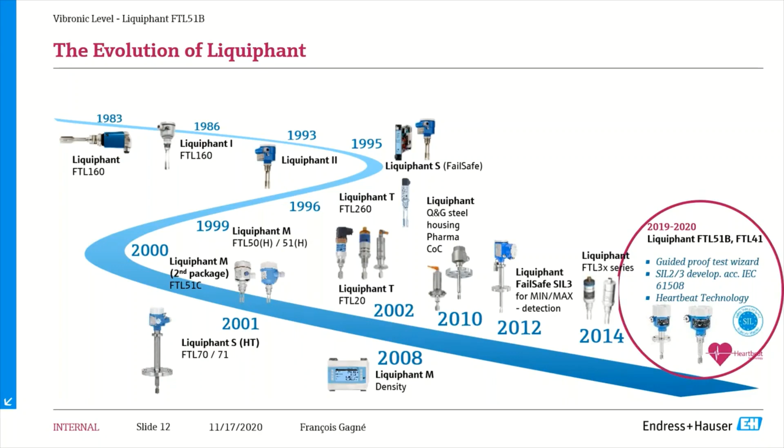Today we're going to focus on the latest edition, the step in the present and the future of vibrating forks, the FTL51B. We also launched the FTL41, which is a stripped down, more basic version of the 51B. We won't talk about it today, but we did launch that more basic version at the same time.

So for Liquiphants, the challenge was to have a fully welded sensor with no moving parts or additional seals. So unlike float switches, for example, vibronic instruments do not require maintenance and have a long service life. Other advantages: they're very easy to install, basically plug and play. In most cases, you don't need to adjust or calibrate anything. Since there are no moving parts, no wear and tear, it's basically maintenance free.

And it's a technology that's not affected by buildup, as long as the fork can vibrate - air bubbles, foam, suspension, vibration, viscosity, and pressure and temperature changes. Any turbulence won't affect the Liquiphant.

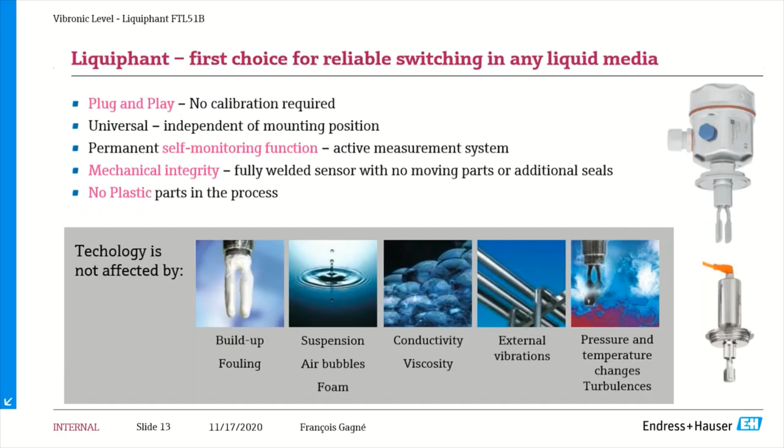As I mentioned, we're going to focus today on the 51B, but as you may have noticed on that timeline, on the evolution there, we have different models: compact, hygienic design. We have the FTL70/71 for high temperatures, the FTL80/81 for fail-safe overfill prevention in applications with functional safety up to SIL 3. But today I want to focus on the latest edition, the 51B, though I wanted to show that there are other options that we have in tuning forks and vibronic level.

So the 51B, we call it the all-rounder because of its versatility. Point level detection for tank overfill prevention or pump dry run protection, so high alarm or low alarm. It's a SIL 2 or 3 device, with proof test that can now be supported by a wizard that walks you through the steps. We'll have a closer look at that.

Heartbeat - if you've seen Endress Hauser product presentations in the past few years, you must have heard about Heartbeat. Now it's coming to the Liquiphant with the FTL51B, and that's a big change. Lots of value there. We'll have a closer look at that.

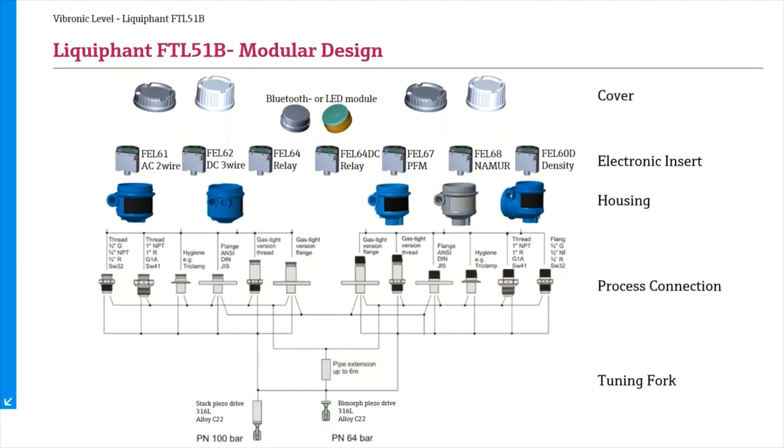Of course, different process connections, as I mentioned, the 100-bar option, different electronics if you want to do density, for example. We'll have a closer look at that later. So yeah, we still have that modular design or product structure. These are the four key new additions, benefits that the FTL51B brings.

To the vibrating fork range, and I want us to have a closer look at these one by one. So the Bluetooth connectivity, the heartbeat technology, as I mentioned, SIL, but most importantly SIL proof testing, and also we'll have a quick look at that LED light, which is a great addition. Let's start with Bluetooth.

We're adding Bluetooth to more and more of our devices. It's a popular feature. This for the FTL51B would also work with our SmartBlue app. You can connect for sure from 10 meters, but in ideal conditions we were able to reach 20 meters. 10 meters for sure, so that's 30 feet up to 60 feet if everything's perfect.

And you will use that Bluetooth app and interface to access heartbeat diagnostics, verification, monitoring. That proof testing wizard walkthrough will also happen on the Bluetooth app. And of course, as you may know, everything we do with Bluetooth is super secure with encrypted data, so no issues there. You can get our app for Android or Apple.

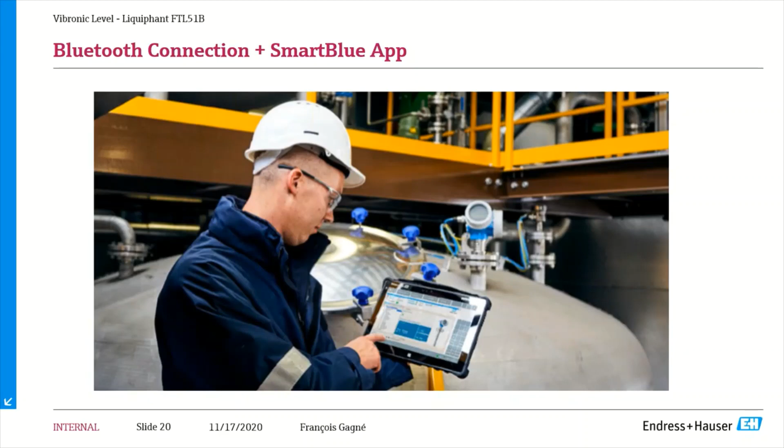So that's Bluetooth connection, and as I mentioned, Bluetooth and the SmartBlue app will be your gateway to heartbeat. What is heartbeat? Heartbeat, again, it's the same thing for the FTL51B, the three pillars. Heartbeat is meant to increase and guarantee safe plant operations, ensure availability so there's no stopping to do verification, no pulling out meters to verify them, and eventually save time and costs.

So you have your first pillar, diagnostics. That's the continuous self-evaluation that the meter does of itself. It gives a device status with pictograms. You want to see that green check mark that says everything is okay, but you could also see maintenance required, out of spec, or device failure, and you'll get a message if ever an event occurs.

So that's diagnostics. Verification - that's an on-demand performance check of your device without process interruption. And that performance check also generates a heartbeat verification report that will show the result of that verification, either a pass or fail. We'll see, I have an example of what a report could look like for a FTL51B.

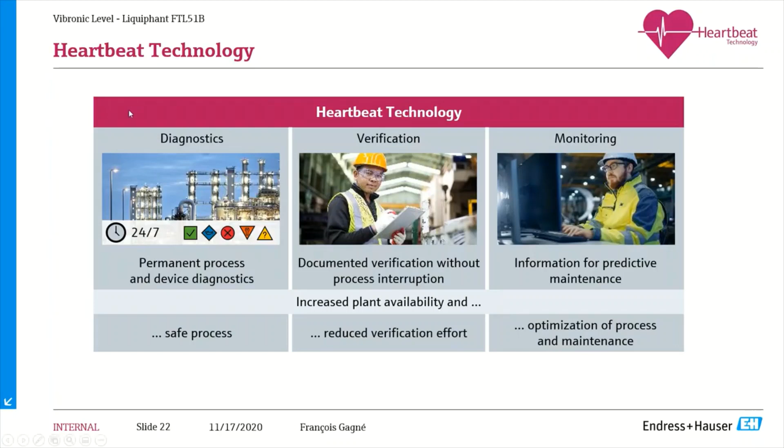Finally, the last pillar is heartbeat monitoring. Now, diagnostics is more reactive - when something happens. Verification you would run to prevent something, and heartbeat monitoring is more for predictive maintenance. You would track reference parameters, for example the frequency, the changes in frequency of that vibrating fork, to predict when it would be time to do maintenance. So that's monitoring - all three pillars.

Diagnostics, you will have - so that's what it looks like when you connect to your device. That's the SmartBlue app. You're on your iPhone, your Android phone, or your SMT70 tablet. You'll see what Endress+Hauser devices you can connect to. Then you pick, in this case, you will tap your FTL51B, and then you're taken to a screen where you will instantly see device information.

What's the status? Is my tuning fork uncovered or covered with media? What's the oscillation frequency of the fork? So that's right there in your home screen, the heartbeat diagnostic. You'll also be able to go in another menu to run your heartbeat verification, and you can do that, of course, while you're measuring, while you're outputting - there's no interruption.

And you run the verification and you get that detailed report. That's an important part of it, getting that report where you will see device information, overall verification test results. Then you get more detailed results.

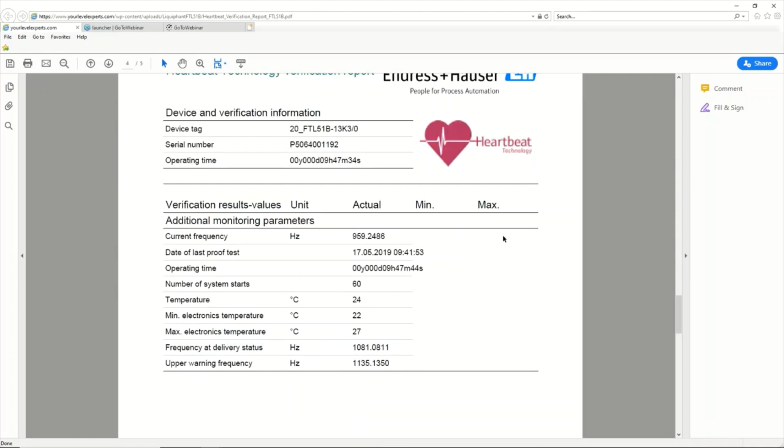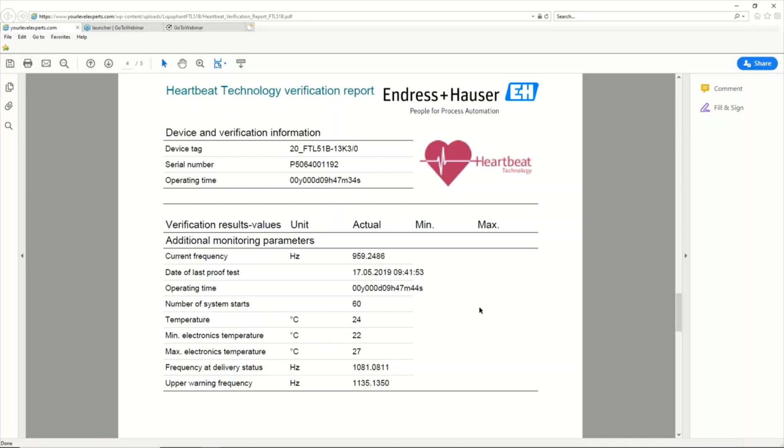And it's detailed. You even have your date of the last proof test because it's connected in the app. You have your frequency, electronics temperature, and a bit of history. Every time you run the tests, it stores information.

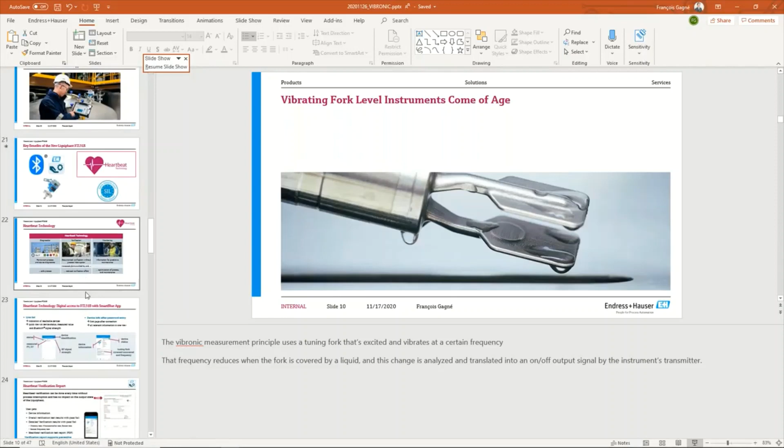So that's what it looks like, that's what I wanted to show. Really a simple, safe way to do verification. So I'm going to go back here.

And talk about how, with the trend analysis, you can take it one step further. Vibrating instruments, as we saw, don't have any moving parts. So basically the only problem they may encounter is corrosion of that tuning fork, or excessive buildup that would prevent or dampen the vibration of the tuning forks.

Being able to track that oscillation is an advantage compared to other physical principles like floats, because for vibrating point level switches, that frequency is also an indication of a potential issue. So by tracking oscillation variation, the fork basically self-monitors.

And of course we have corrosion resistant metals, we saw it in the structure, stainless steel, alloy for the FTL51B. But very aggressive chemicals over time can eventually eat through even these types of materials. And when tuning forks corrode over time, they cannot give as accurate a measure, or can break off.

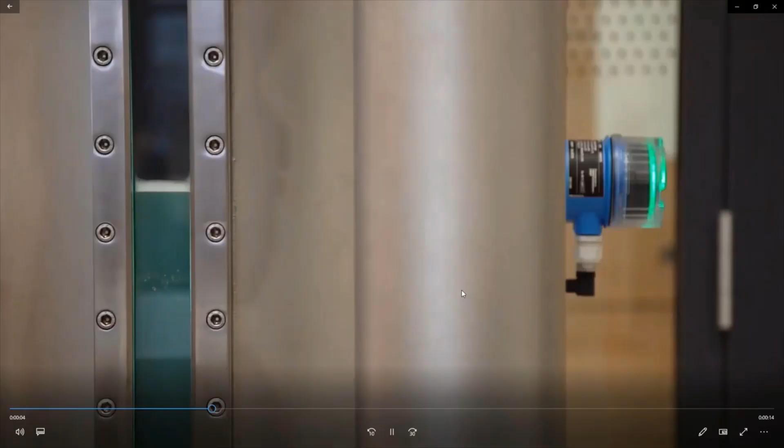Yeah, so you see that green light, orange, I'm covered with medium, and now the red light. You can see that it's nice and bright. So if it's up there on a tank, you'll have no problem seeing it, or if you're in a mine somewhere and it's very dark, you can't miss it. So it makes everything very, very safe by indicating the status with that bright light.

Last but not least, as you've noticed in the features, the FTL51B was developed for SIL 2 and SIL 3 applications. SIL means proof testing, so point level instruments may have to be periodically proof tested to meet various safety regulations.

This could have been a problem with older instruments, where you have to remove them from the process, stop your process to test them. Not so with the FTL51B. You have different ways to trigger it. You won't trigger the SIL proof test with the SmartBlue app; for safety reasons we don't want people to accidentally trigger a SIL test. But what you will have is a wizard that's very simple and intuitive, that will guide you through the process step by step from beginning to end. Most importantly, it will save the data and create a PDF electronic report that you'll have right there on site once testing is done, that you can give to your inspector.

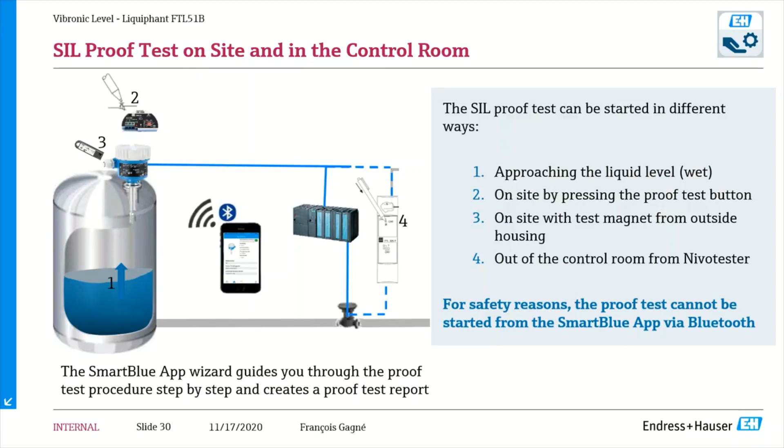SIL proof test. The wizard will start really from the beginning: do you want to do a wet test or an electronic test? Are you using a magnet and Nivotester? And then we'll guide you all the way to the end to the production of that report. So really easy, convenient, safe way to do your SIL proof testing.

As mentioned, in the SmartBlue app you'll have a wizard that will guide you through step by step, creates that report, and documents the whole thing.

I wanted to show you this just in case you do have, for any reason, to remove your Liquiphant, your FTL51B, from your tank. We have these accessories, these Camlock Kits with a sliding sleeve that make it much easier to remove the device from the tank. You just basically unclamp it and you can take it away. You don't have to unscrew it. If you have a cable that's very tight, it can be a little bit complicated, so I wanted to show this so you know that if you're in a situation where you absolutely have to remove it, ask us about these Camlock kits. They really help save a lot of time.

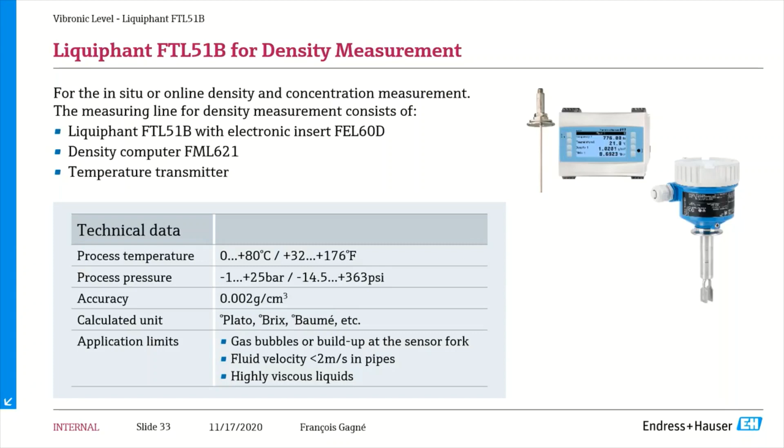Also, as mentioned earlier, you can use your Liquiphant for continuous density measurement, which can be an advantage doing it continuously in process versus in the laboratory. Could be more efficient, simpler, and safer than lab testing. There's an electronic module now well integrated into the structure of the FTL51B for density measurement, plus the density computer, FML621, and then you can add a temperature transmitter, perhaps even a pressure transmitter if you have pressure changes. So this is more of an FYI that you can do continuous density measurement with your FTL51B.

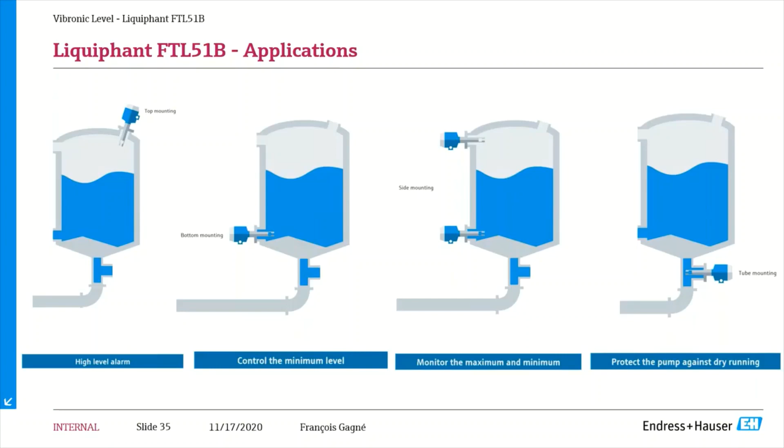As Mike was saying, the FTL51B is a liquiphant for liquid applications and point detection. You can have it at the top of a tank, at the bottom of a tank, or both top and bottom to do a maximum and minimum measurement, and in a pipe to detect that a pipe is empty and protect the pump.

So this is one application in food and beverage, where the heartbeat monitoring of detecting buildup was important. You could see that over time, the frequency was getting smaller and smaller, so you're able to detect that there's buildup on your fork, and you can then schedule maintenance before it stops vibrating, basically, and go ahead and clean your fork.

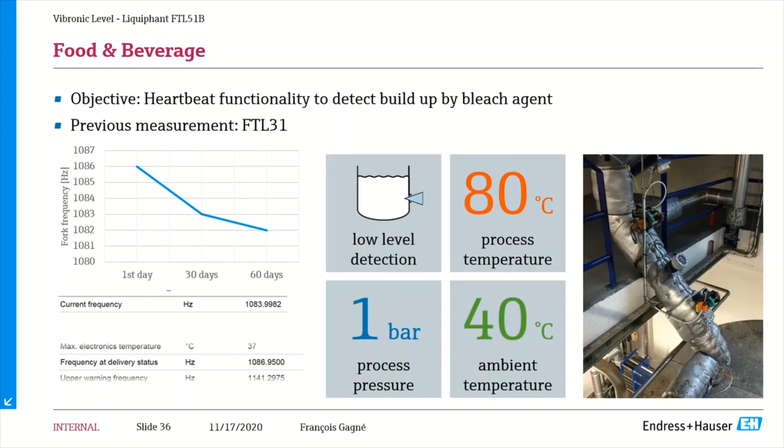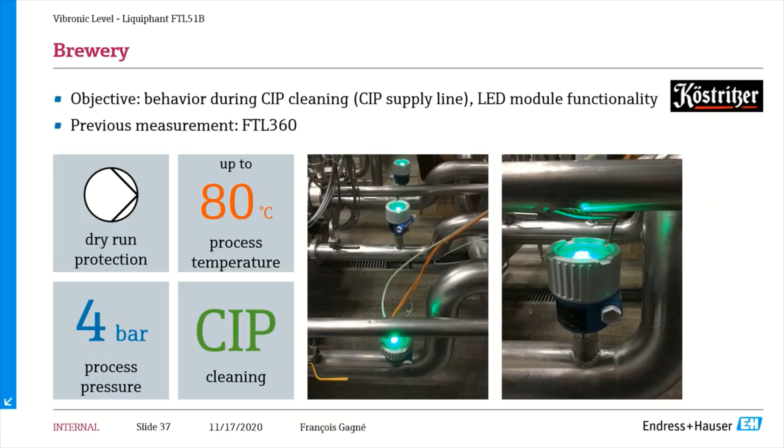In a brewery, that's a great example of how that visual LED indicator can be useful in a CIP process for empty pipe detection—to protect your pump, but also to check: can I open it? Is it really empty? So it's all related to safety, and that LED module brings a clear visual indication of the status. Here are more pictures, so you instantly know what's happening in your pipe.

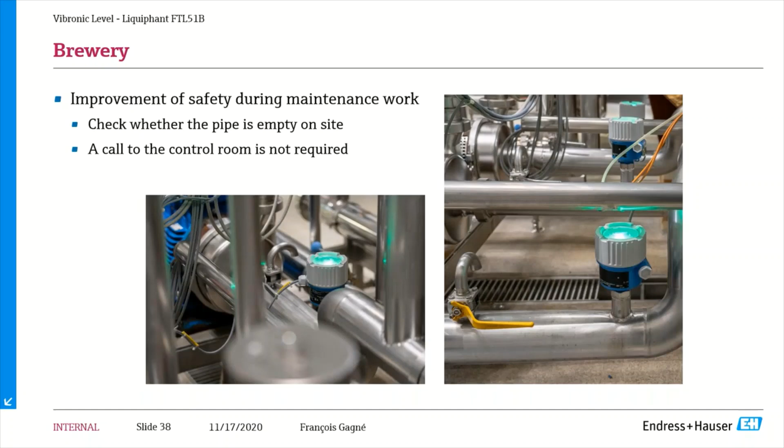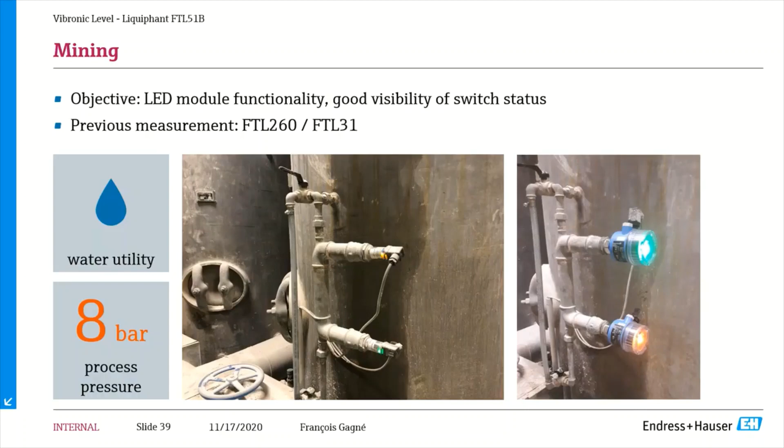Again, here's just to show the improvements. Let's say an environment where lighting is not optimal, to say the least. You can see that you won't miss these lights compared to another option where, yeah, you have lights, but they can get covered in dust or are not as easy to see. So in a mining application where you possibly don't have ideal visibility, this is really useful.

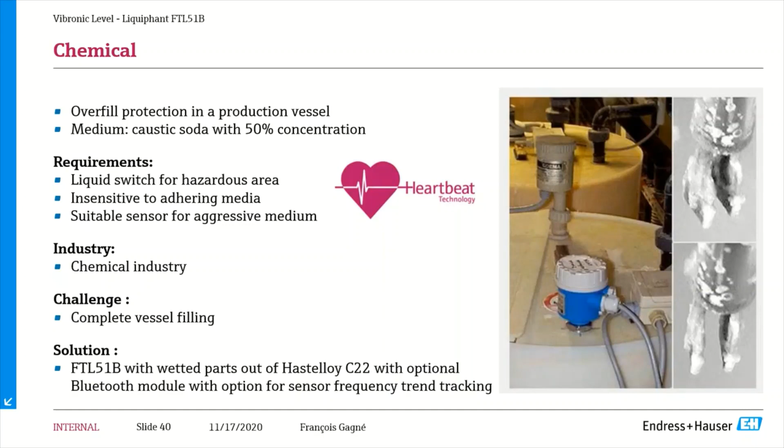That's a chemical application—a situation again with buildup. You can monitor the oscillation frequency and know when the buildup has reached a certain threshold where you'll want to do scheduled maintenance. So again, with heartbeat.

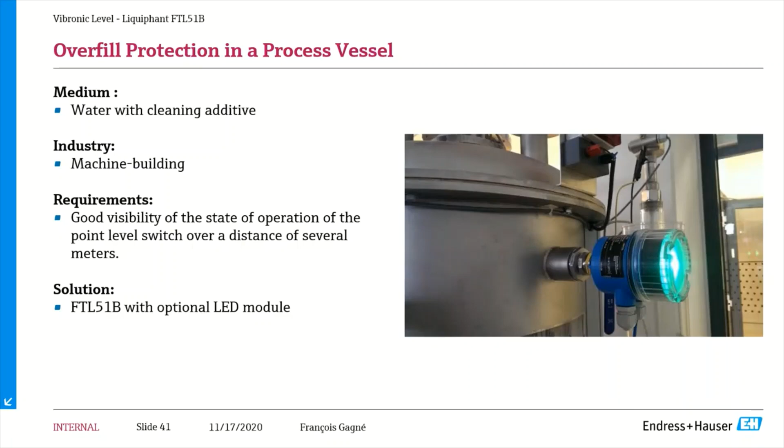Here's another example of how that LED module is used in an application for overfill protection—great visibility of the switching status, making it easier to identify a device that needs attention. And that's it. There are many more things you could do, but this was just to show real life examples.

In a nutshell, what we saw today, the key benefits: Bluetooth connectivity up to 10 to 20 meters away, where you'll access heartbeat and your proof testing wizard. With heartbeat, you'll have your diagnostics, be able to do your verification report, and monitor to detect buildup and corrosion, for example. That LED light, we saw plenty of that.

And then proof testing with multiple ways to initiate it, and that wizard on the SmartBlue app that takes you through it step by step, but also saves the data, gives you a nice PDF report that you can email or print. So that's what the FTL51B brings to vibronic level measurement.